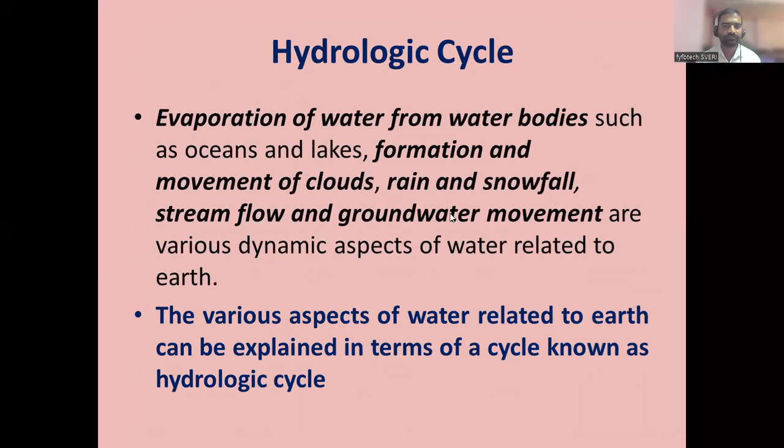In the last class we have studied about the hydrological cycle, is it correct? Yes, this is the entire cycle of the hydrological cycle. Can anybody explain this cycle?

How was your ISC paper? I wanted to ask about that one, I have not seen your paper set. How was it? Was it good or bad or okay? Any responses? Good, sir. Okay, it was good. Any other answers? Okay, better, best.

Have you written all the questions? Yes, sir. How many marks was that paper? 30 marks. Out of 15 in BCME1, will you get 15 out of 15? Anybody? Was the MCQ easy or difficult?

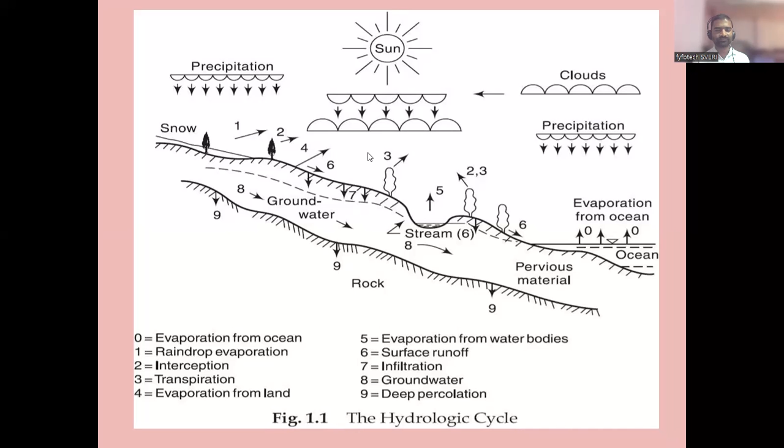Okay, so this one we have explained all the things.

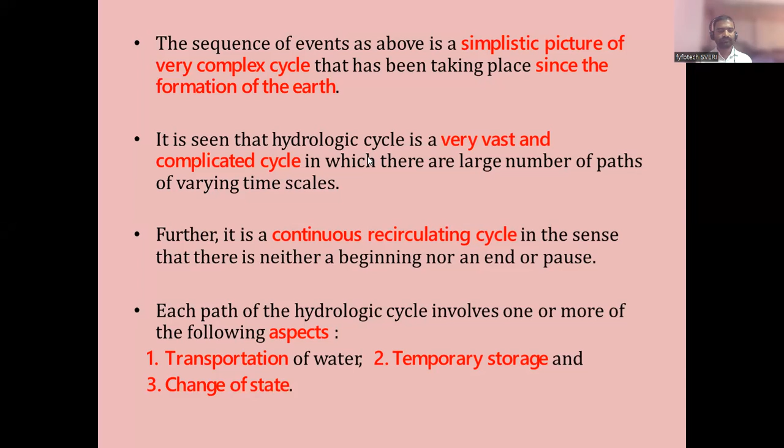Any other doubts? No doubt, no?

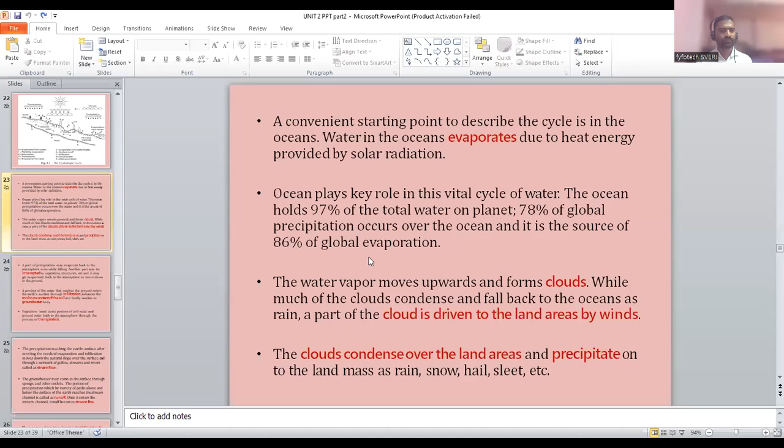Why is it not visible? Okay, this one we have completed, no? Main components of the hydrological cycle. Yes, sir. Okay.

So in the last class, is it visible everyone? Yes, sir. Okay, so this transportation component and where the water is stored, the storage component, we have seen in the last class. Okay, next, coming to the point of dams.

Can anybody tell me what is a dam? Dam means what? What is dam, yes, anyone, in your own language. Okay, no problem, accurate definition is not needed - dam, what comes to your mind? Storage of water. Yes, good, storage of water.

Next, any other definitions? Okay. Dam is a solid barrier constructed at a suitable location across a river valley to store the flowing water.

Okay, whenever water is flowing - just a minute - okay, whenever, when you consider this is a river, okay river, whenever water is flowing like this, you have to store this entire water, and you have to utilize it in a proper way. If you don't utilize this water, then it will go and reach the ocean. Okay, ocean.

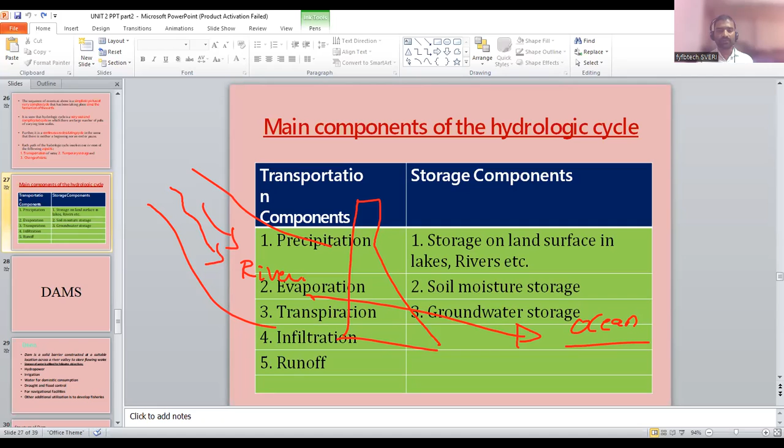Okay, in order to avoid that, in order to store this entire fresh water, we have to construct a barrier - a solid barrier constructed at a suitable location. This is important - at a suitable location across a river.

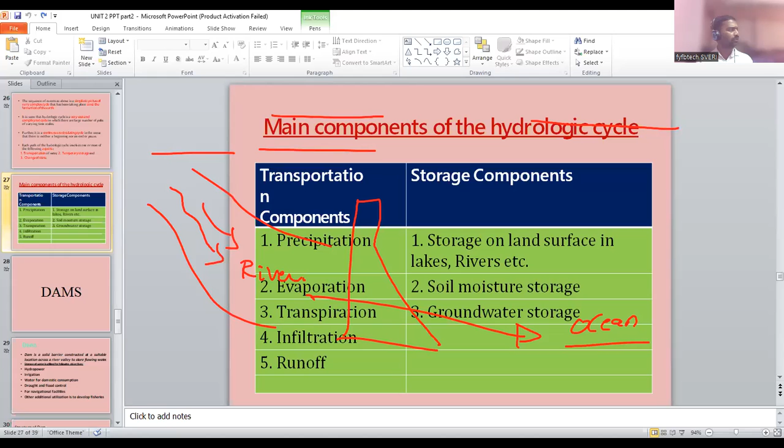Sir, has the slide changed? Slide change hua? Everyone, is the slide changing? No, sir, only it is there. Okay yes, wait, I will.

Now is it visible? Yes, sir. Okay, so dam is a solid barrier which is constructed at a suitable location across a river to store the flowing water. So when you consider this is a river - so river, is it visible? Whatever I am writing on the screen. Yes, sir, okay. So this is a river, okay, so water is flowing. If you don't store it in a proper way, then it will go and reach the ocean.

Okay, ocean. So in order to avoid this reaching the ocean, we have to construct a solid barrier, and this water is stored in a proper way.

Whatever water is stored has to be used properly for irrigation purposes, town planning, recreational purposes, residential purposes, institutional purposes, or any other purpose like drinking, bathing, clothing. For all these purposes, you can use the stored water.

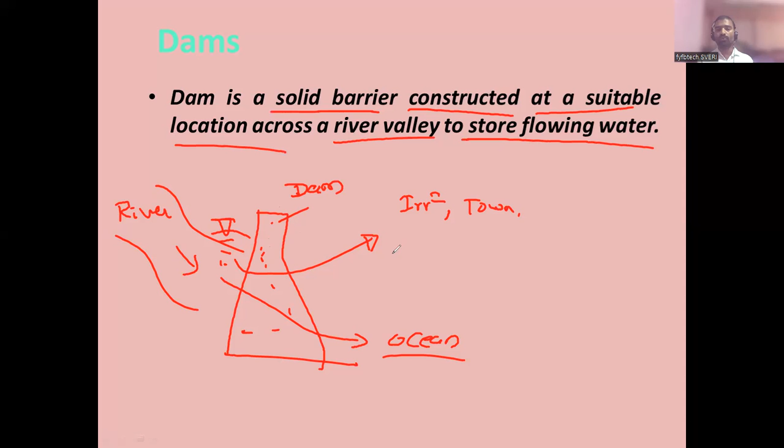So the entire structure is called what? It is a dam. What is a dam? A dam is a solid barrier constructed at a suitable location across a river valley to store flowing water. Whenever water is flowing, we have to store it in a proper way. That is called a dam. Is it clear, everyone?

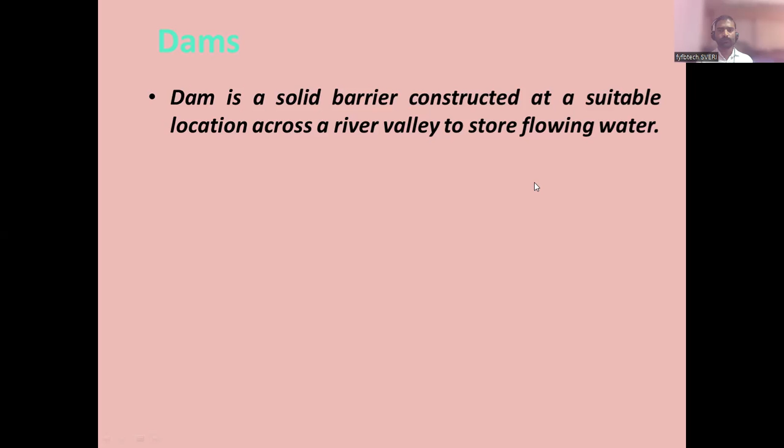So storage of water is utilized for the following purposes. Why store the water? What is the advantage of storing water? We can use the stored water for hydropower.

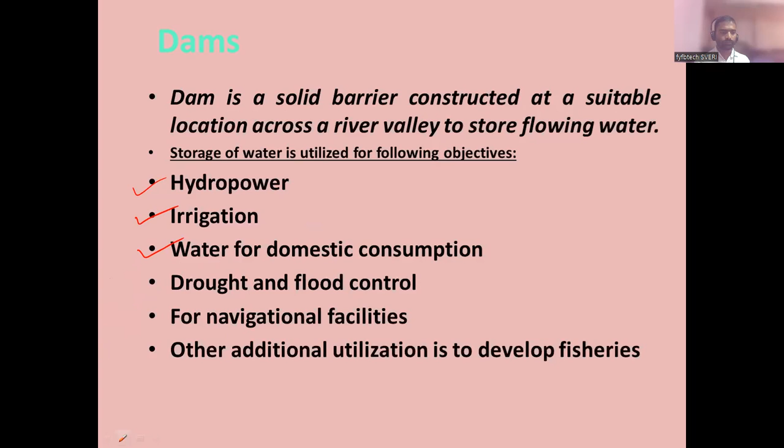Then we can use the water for irrigation purposes, for domestic purposes, and for drought and flood control. Whenever there is drought or water excess, we can use it for drought and flood control.

Next, for navigational facilities we can use it, and additionally it can be developed for fisheries. So in order to do fisheries and all, we can use this dam. The entire purpose is served by the dam.

So by constructing a dam, the main purpose is for hydropower. We can generate electrical energy from storing the water. Then irrigation purpose, we can use water for domestic consumption.

Whatever water we utilize in our day-to-day household is from the dam only. During drought, meaning when there is no rainy season, during full summer there is no rain. In that condition, the stored water can be used.

During flood control, if the rain during the rainy season is very high, the water flows excessively. The entire water is stored in a dam, and at that time the flood is controlled. And navigational activities, so these are all the purposes.

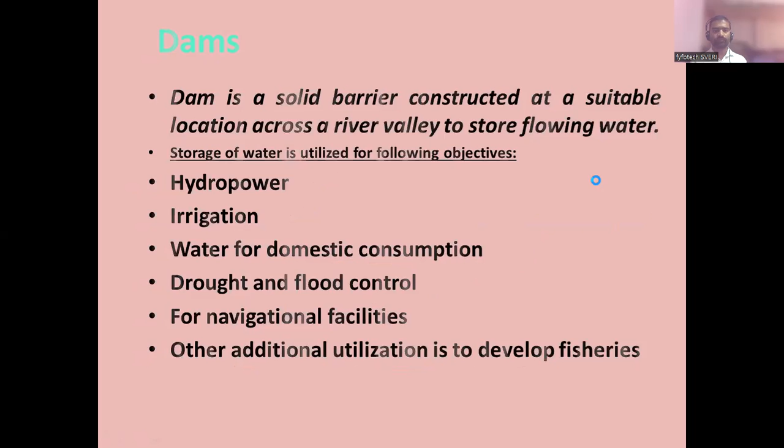Next, the structure of the dam. So this is the basic structure of the dam. Is the slide visible? Yes sir. So this is the entire concrete structure, made of different types of structures.

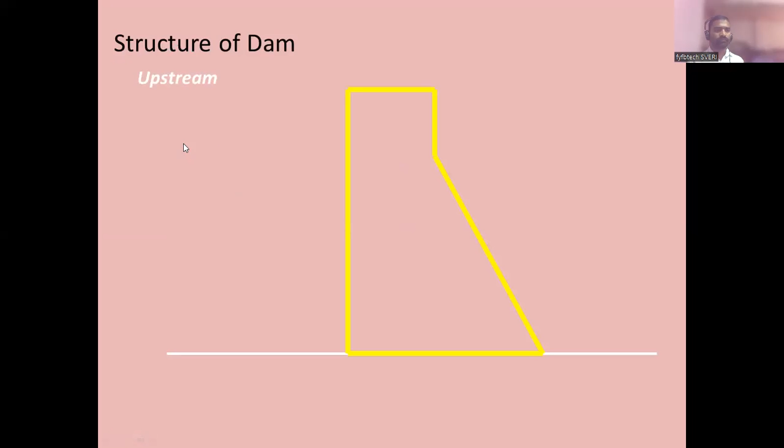So the first one is upstream side, and the other one is downstream side. Upstream means the portion of the dam in which water is stored. At the upstream side water is stored, and at the downstream side there will be a gate, and the water flows through the downstream side.

So this point is called heel. Heel is that portion at the bottom portion of a dam towards the upstream side. Heel is that portion of the dam which is at the bottom and near to the upstream.

And what is toe? Toe is the bottom portion of the dam which is at the downstream side. These two points are very important, heel and toe.

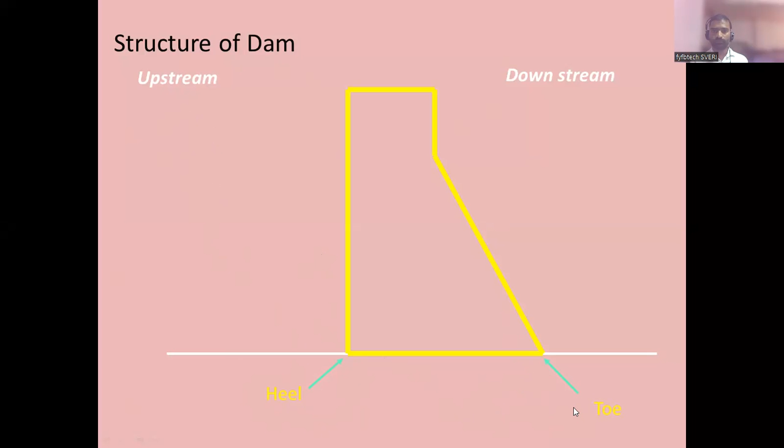Are you remembering? So from the dam, how do we take the water? Through the sluice way or sluice gate. It is called a sluice gate or sluice way.

The topmost portion of the dam is called crest, and the bottommost portion has two parts: one is heel and the other is toe. Where is the heel present, near the upstream or downstream?

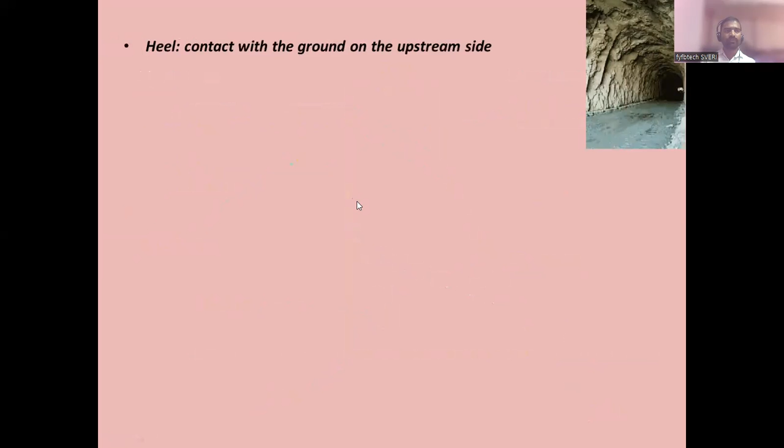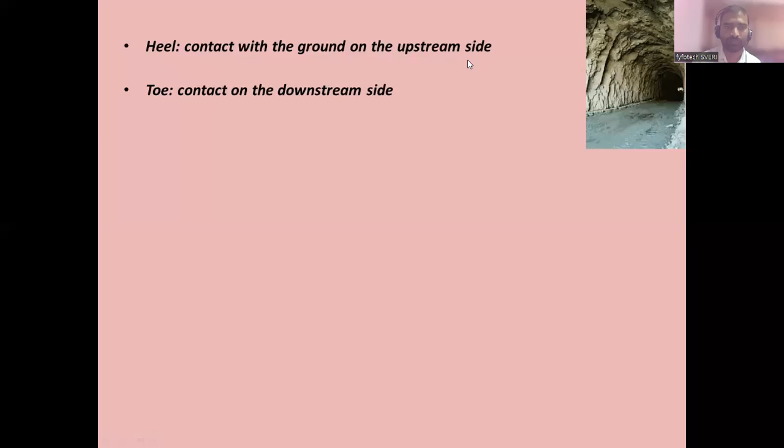Okay, so we'll see one by one, what is heel, what is and all. So what is a heel? Heel is contact with the ground on the upstream side. You have seen this is heel. It is that portion of the dam at the bottom, on the upstream side, that is connected to the ground.

Is it visible, full slide? Yes sir. So you have seen heel. Next is toe. Toe is also contact with the ground, on the downstream side. So this you have seen the toe, and this you have seen the heel.

That is called an abutment. It is the side of a valley on which the structure of the dam rests. This entire dam rests on these two structures, that is called abutments.

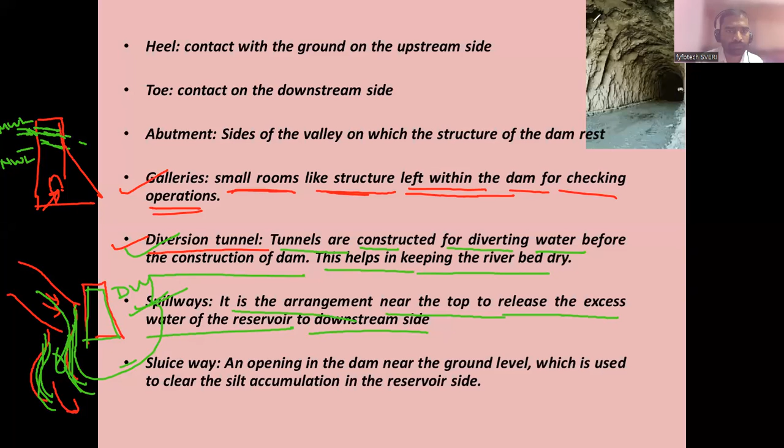So consider this normal water level, and this maximum water level, MWL. When the water is going above the maximum, at that time there will be a spillway portion, and through this spillway, the water is removed.

Then what about the sluiceway? Sluiceway is an opening in the dam near the ground level, used to clear the silt accumulation on the reservoir side. When the water is stored here, it contains silt content—sand or stone particles—that gets stored here. As these particles accumulate, the silt content increases, so that silt is removed through the sluiceway, and the gate can be opened so that water flows through the sluiceway.

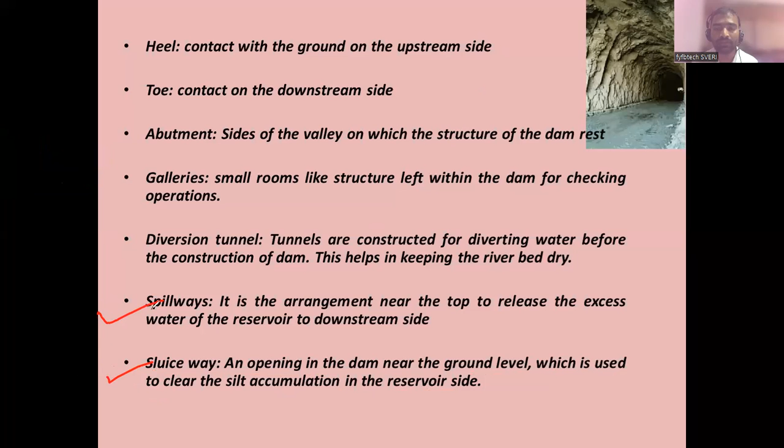So through the spillway, what is removed? The excess water above the maximum water level is removed. Through the sluiceway, the normal water is removed. If you want to use water for irrigation, it is removed from the sluiceway. If you want to allow water through the canal, you open the sluice gate. If you want water for household purposes, for the water treatment plant, you open the gate of the sluiceway. So the sluiceway gate is opened for all water works, and the spillway is opened when the water is above the maximum water level.

Now, types of dams. Before going for the types of dams, is this dam structure clear to everyone? Yes sir. Okay, see the maximum water level is here.

When the water goes above the maximum water level, through the spillway water is removed. There is also a sluiceway. When the water level is normal, in between these two, if you want to extract water, which gate will you open? That is the sluiceway. In your MCQ questions, most of the time this will be asked.

So when the water is beyond the maximum water level, which type of gate is opened? Spillway gate, sluiceway gate, both or none? Above the maximum water level, spillway is opened.

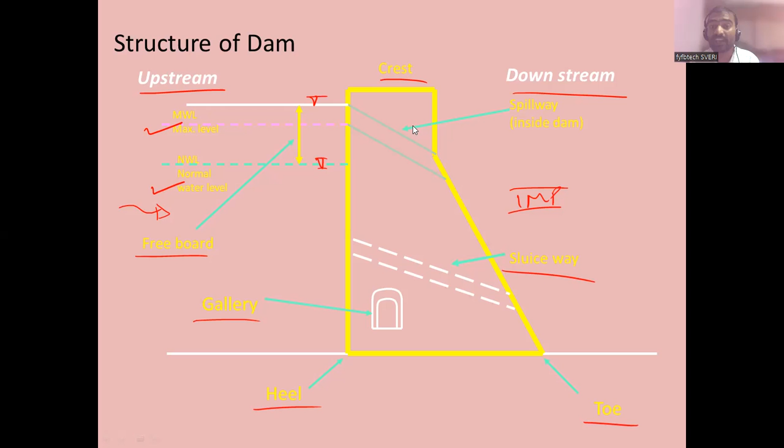If the water is used for river or irrigation purposes, which gate is opened? Spillway gate, sluice gate, both or none? For irrigation and for all purposes, the sluiceway is used. The spillway is used when the water level in the dam goes beyond the maximum water level, and that excess water is removed. That is called a spillway.

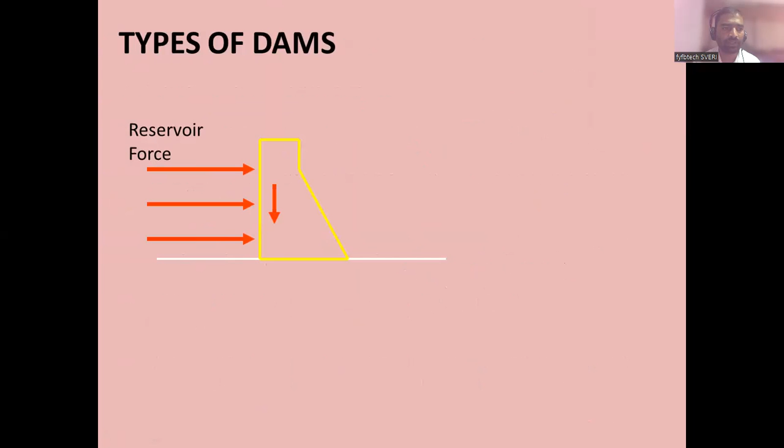Then there are different types of dams. What are the types of dams? We will see. You have seen this is the reservoir. This is the entire dam.

In the dam, two types of forces are acting. One is reservoir force and the other is self weight. The downward force acting on the dam is called self weight of the dam. Then what about this horizontal line? These are the water forces. The water force acting on the dam is called reservoir force.

Water is storing, correct? The entire water is coming and striking the surface of the dam. Hence there is a reservoir force striking the dam.

Then gravity dams. What are the different types of dams? First, types of gravity dams. The first type is the gravity dam. What is a gravity dam? These dams are heavy and massive wall-like structures of concrete in which the whole weight acts vertically downward.

Here you can see it like this, but the entire dam will be from here to here. It is very heavy. The weight of the structure is very heavy and massive, a massive wall-like structure of concrete in which the whole weight acts downward. The entire weight of this dam acts downward. Such a dam is called a gravity dam.

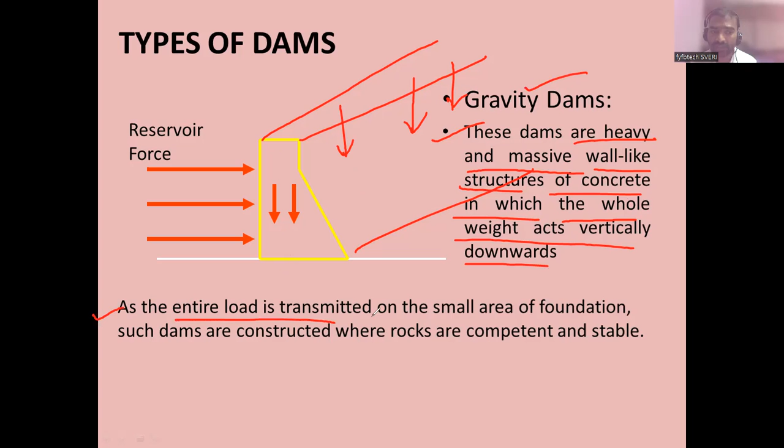As the entire load is transmitted on a small area of the foundation, such dams are constructed where rocks are competent and stable. If it is a gravity dam, its foundation is very small. So in order to withstand a very heavy structure, the foundation should be laid on rock that is competent and stable.

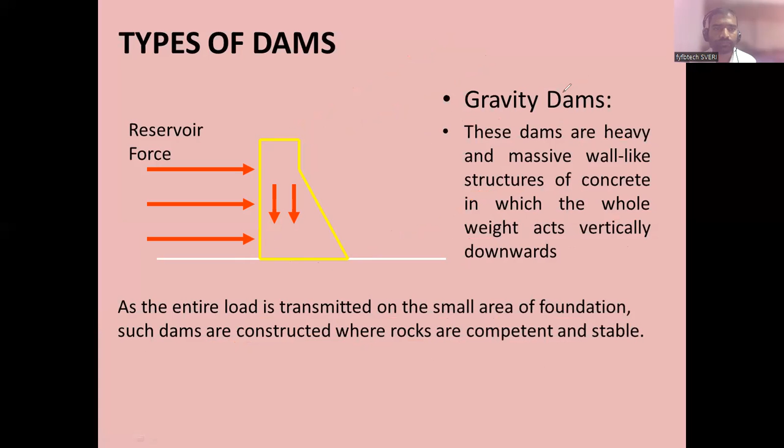Okay, then see, this is the structure of the gravity dam.

See, from here to here there will be a very long length. The entire amount of water is storing. The entire weight of this dam is acting downward.

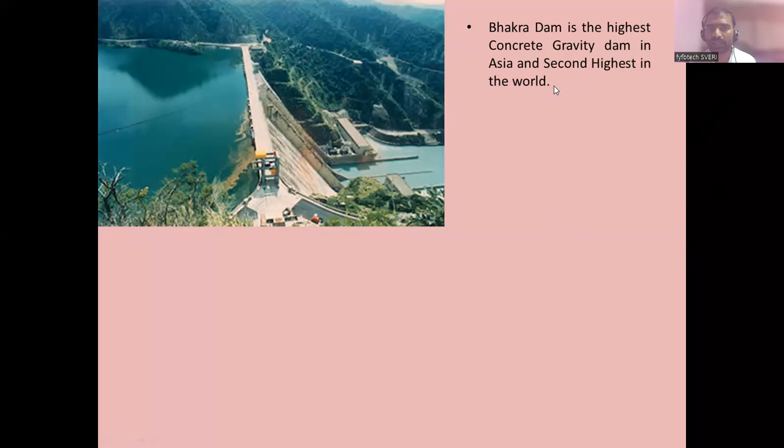Next, Bhakra Dam is the highest concrete gravity dam in Asia and second highest in the world. Bhakra Dam is across the river Sutlej in Himachal Pradesh. Where is the Bhakra Dam? It is in Himachal Pradesh. Across which river is it constructed? It is constructed across the Sutlej river.

In multiple choice questions, you may be asked: Bhakra Dam is constructed across dash river - that is Sutlej, located in Himachal Pradesh. This Bhakra Dam is the highest concrete gravity dam. So Bhakra Dam is dash type of dam - it is a gravity dam. It is second highest in the world and first highest in India or Asia.

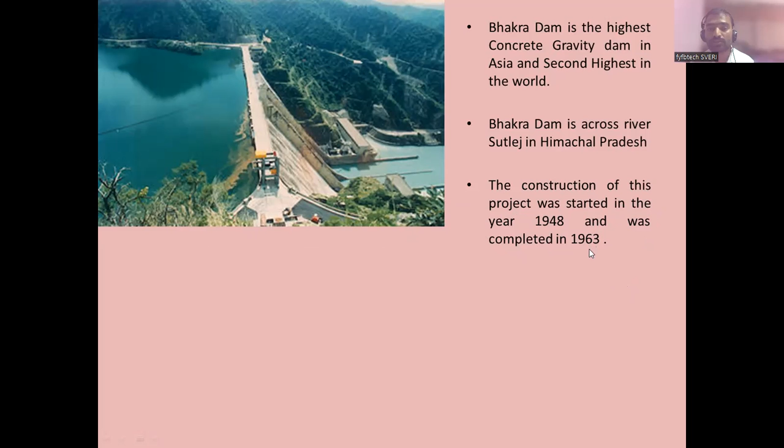The construction of the Bhakra Dam project was started in the year 1948, very soon after independence, and it was completed in 1963. It took around 15 years to complete the entire project.

The height of the Bhakra Nangal project dam is 740 feet high, above the deepest foundation as a straight concrete dam, being more than 3 times the height of the Qutub Minar.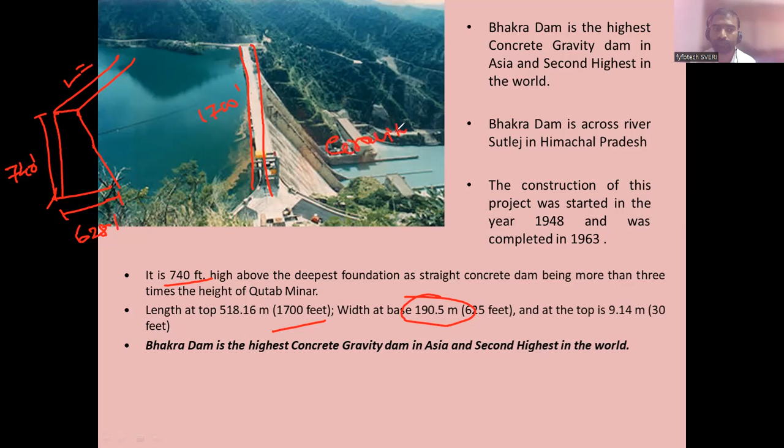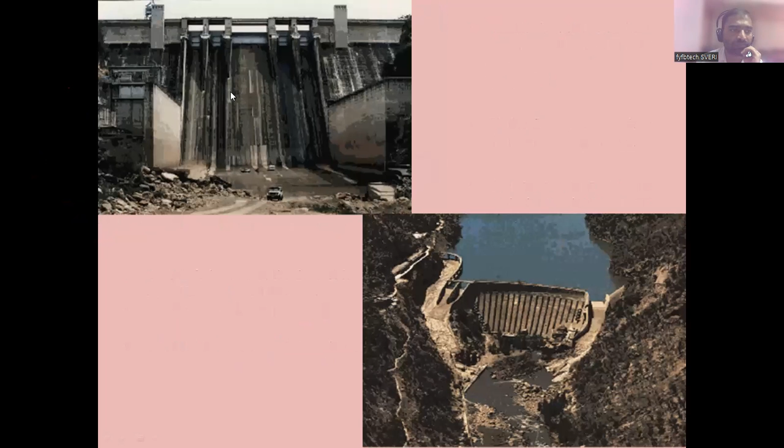See, again, one point is given. Bhakra Dam is the highest concrete gravity dam in Asia and second highest in the world. See the dams, these all are the gravity dams. See the structure.

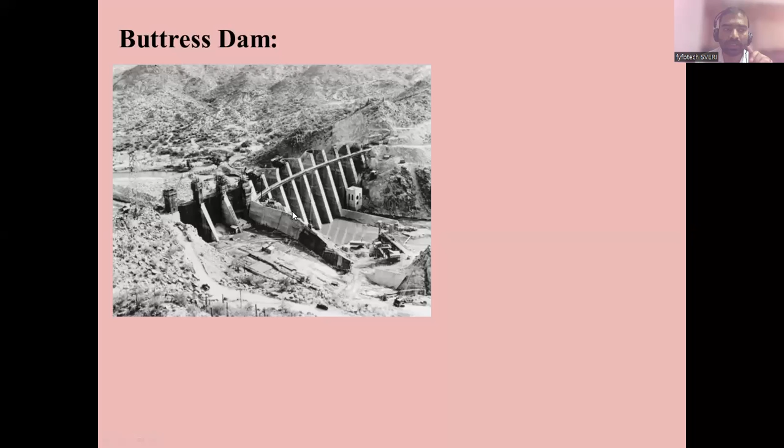Next one is Buttress Dam. Here buttress dams are like buttress, in which the weight of the entire structure is transferred from one buttress to another. So Buttress Dam is a gravity dam reinforced by structural support. It is a gravity dam only, but it is reinforced.

What do you mean by reinforced? Reinforced means what? I told in the class. What is reinforced, matlab kya hai? RCC means what, can anybody tell me?

RCC, reinforced cement concrete. Yes good, then what do you mean by reinforced means what? Reinforced means steel is present. Good point. So Buttress Dam is a type of gravity dam only, but it is reinforced by the structural support. It is made up of steel structures, that is steel is present.

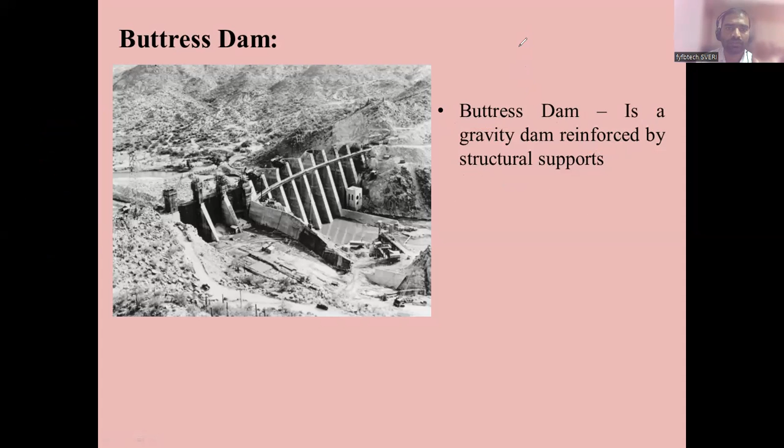So buttress means what, you can just see. Buttress is a support that transmits a force from the roof or wall to another supporting structure.

See, this is one buttress, this is one buttress. If there is water pressure, that pressure is transferred to another structure, like this entire structure is transferred, and finally it comes to the side abutments, or finally to the ground. Whatever the total self weight is, that will come there. Sometimes there is horizontal pressure, that will come to the abutments. Buttress is a support, so it is like a column.

Consider this is a very high structure building, a high rise building. So one floor's wall weight is coming to this column, that column transfers it to the next floor. So here there is weight that is transferred to the next, transferred to the next, transferred to the next, it is transferring through reinforcements that will transfer the load. The same way, this buttress is a support that transmits a force from a roof or wall to another supporting structure. This type of structure can be considered even if the foundation rocks are a little weaker.

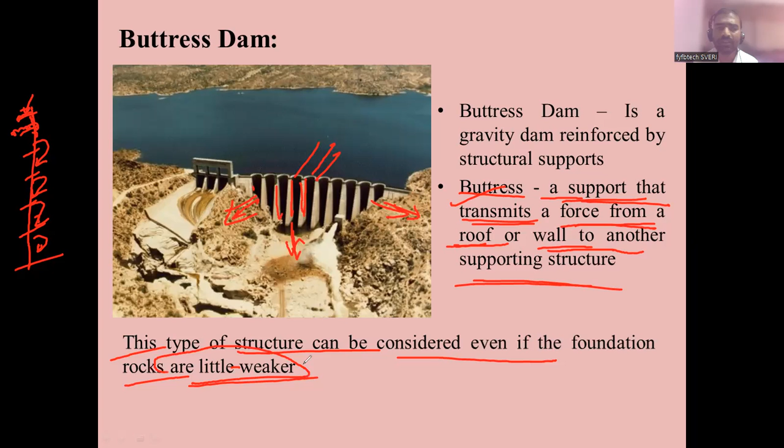You have seen gravity dam's foundation should be very strong, that is the dams are constructed on a rocky foundation, but buttress dams can be constructed even if the foundation is rocky but a little weaker, you can adopt this buttress dam also. Is it clear? Yes sir.

Okay, next one is arch dam. What is this arch dam? These type of dams are concrete or masonry dams which are curved or convex upstream in plan.

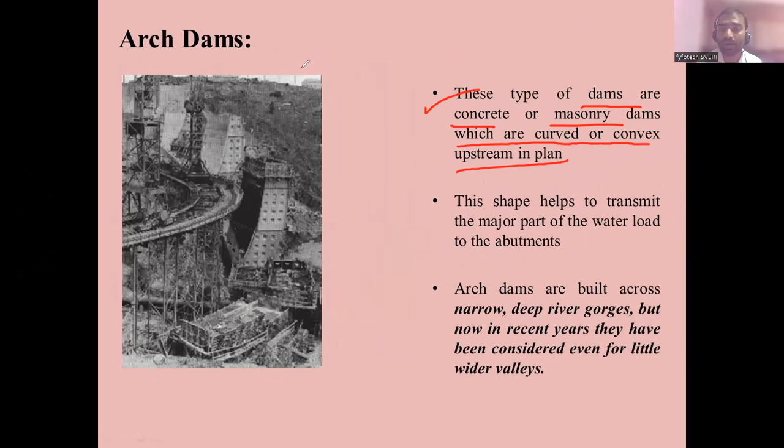What is upstream? Upstream means where the water is stored. See, this is the dam, this is upstream, here the water is stored, here is downstream. So curved or convex upstream in plan, this shape helps to transmit the major part of the water load to the abutments.

If consider there is a flow of water like this, there will be an upstream side, correct? So there is an arch like structure. Is the convexity upward or downward?

Convexity is upward only, on the upstream side. Water is stored here, the convexity is here. So there is a large structure. The weight of water comes and hits the dam. This dam transfers the load to the abutments. See, this is a dam, there is an abutment at this point, and again there will be an abutment at this point. Their shape helps to transmit the major part of the water load to the abutments.

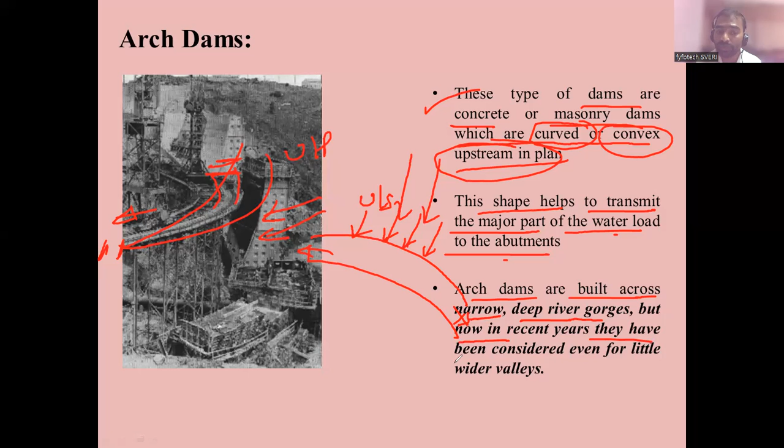Arch dams are built across narrow, deep river gorges, but in recent years they have been considered even for the little wider valleys also. You can see in the figure, I'll show the figure, you will come to know.

See, there is an arch dam, see there is the arch. Now, first of all, you should know what is convexity and what is concavity. So now can we tell, is it convex or concave? Concave, concave, okay.

So if we consider this is upstream, water is storing, that is concave. So now, is it concave or convex? Convex, convex. So when you consider this is upstream, water is okay here.

Here water is stored, so see here, dam. This is an entire dam. So see, it is concave, convex, water is flowing here, water is storing here, upstream side. Upstream side water is storing, so this is the downstream side.

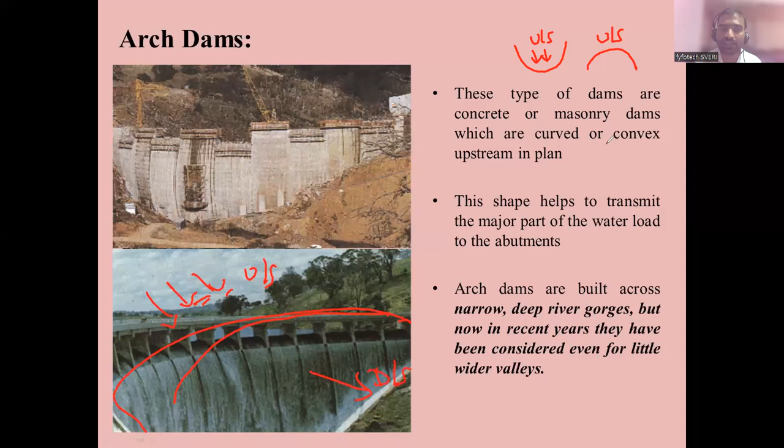Upstream, upstream. So for the arch structure, arch dams, the convexity is towards the upstream in plan. This type of shape helps in transmitting the major part of the water load to the abutments.

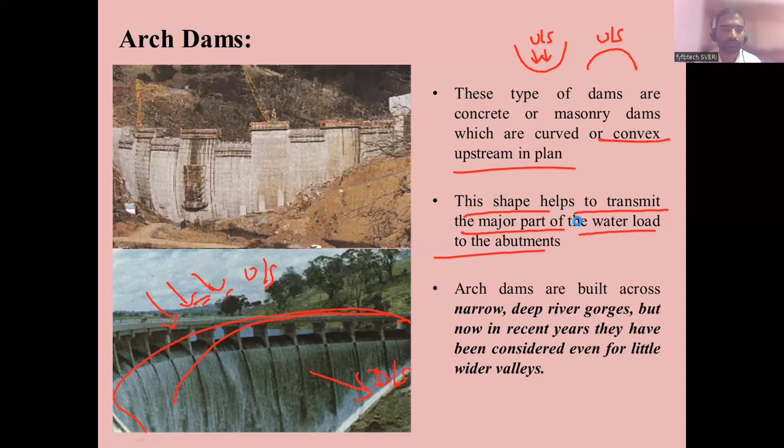Now see, is this like an arch? Arch type shape, no? So water is stored here. This entire portion is where water is stored, and when required, the water is removed through the downstream side.

This is the abutment, this side is abutment. So water is giving pressure to this dam, and the dam transfers it to the abutments. Self weight acts downward, but water pressure acts horizontally. That horizontal load is transferred in the transverse direction.

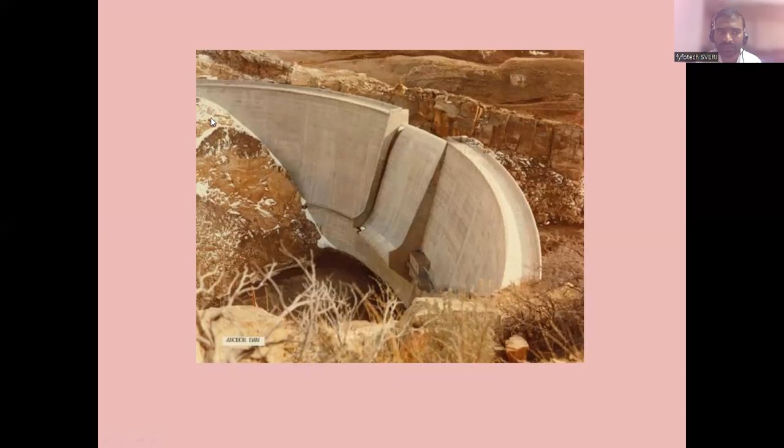See, so this one is exactly how it is. Is it an arch dam? Correct, yes sir. So see, is it upstream or downstream? This is upstream, this is downstream. So what about this one, and this one? These are the abutments, this is the entire arch dam, which is supporting the abutments.

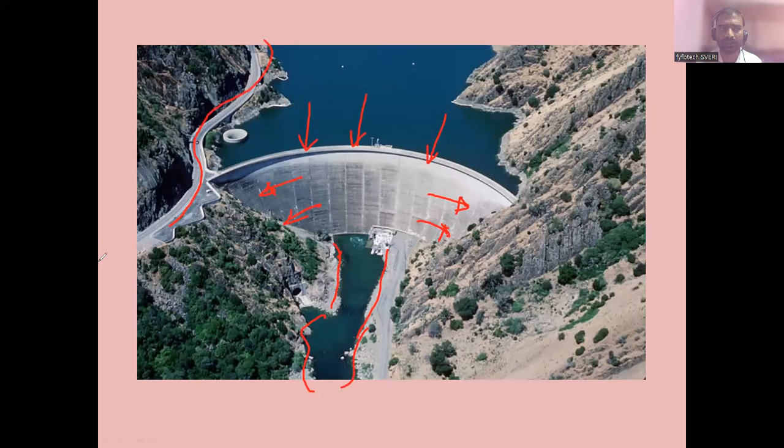So the self weight of this dam acts downward. The water pressure comes and hits the dam in the horizontal direction. That horizontal pressure is directly converted and transferred to the abutments. This is narrow river gorges. So this is how the arch dams are. Again, if you want to travel, there will be river roads and all, you can travel here.

Next one is the earthen dam. These earthen dams are trapezoidal in shape. So you can see here, is it visible now, all of you? Yes sir, so it is visible. So these are trapezoidal in shape, earthen dams are trapezoidal shape.

See, there is no reinforcement, only the pure material is earth. Earth material is there, hence its shape is trapezoidal. Earth dams are constructed where the foundation or the underlying material or rocks are weak to support a masonry dam, or where the suitable competent rocks are at greater depth.

See, this is the ground level. When you consider the foundation material, it should be strong or weak. So whatever structure you are constructing on the ground level, the foundation should be strong, correct? Yes sir.

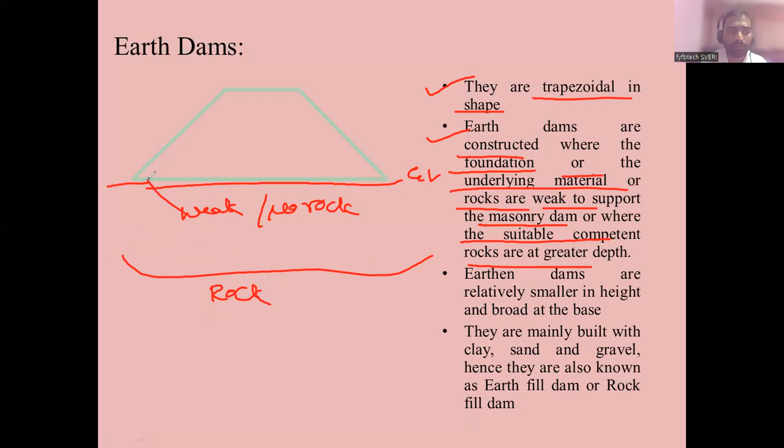But in this case, if the foundation soil is weak, or there is no rocky foundation, or the rock is present at considerable depth with weak material above it, in that case you can go for earthen dams. So earth dams are constructed where the foundation or underlying material, the material below the dam, is weak to support a masonry dam, or where suitable competent rocks are at greater depth, then we can go for earthen dams.

Earthen dams are relatively smaller in height and broader at the base. See, the base is from here to here, but the height is only this much, because it is made up of purely earth material. That's why the base will be very large as compared to height.

Whereas in case of arch dams or gravity dams, the height was very large as compared to the width. Width was less than height there, height was very large compared to width. But in case of earthen dams, the breadth is very large as compared to the height.

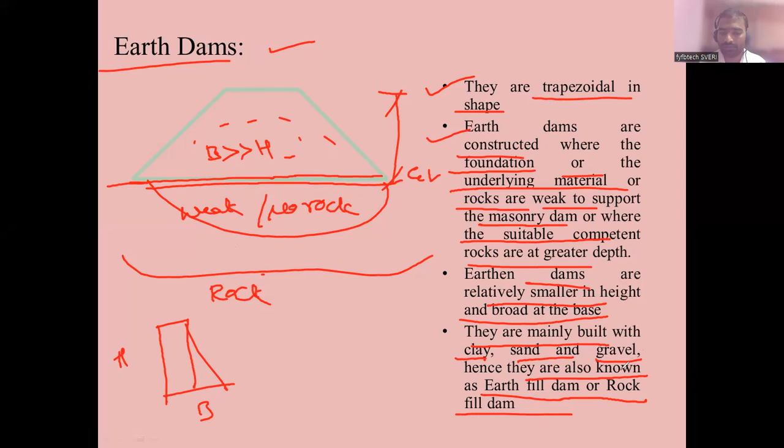These dams are mainly built with clay. The material for the entire dam is clay material, sand and gravel. Hence they are known as earth-fill dam or rock-fill dam. The material of these earthen dams is clay, sand and gravel, so it is known as earth-fill dam or rock-fill dam. Is it clear, everyone?

So the base width is very high as compared to the height. Height is very less because it is made up of purely earth material.

When are earthen dams preferred? When the foundation is very weak, or when the rocky soil is at a greater depth, then we can prefer these earthen dams.

There will be intake structures. Through this, the water is extracted and it is transferred to the water treatment plant.

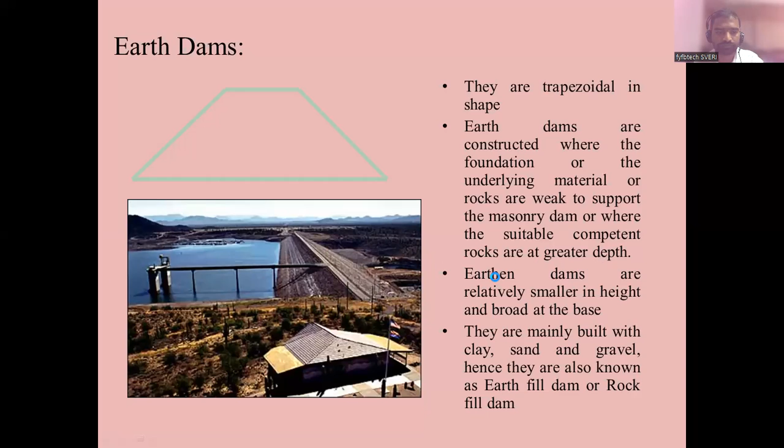So this is all about water resources. In the next class we will study about the different types of transportation systems. So let us check out the syllabus of the second chapter.

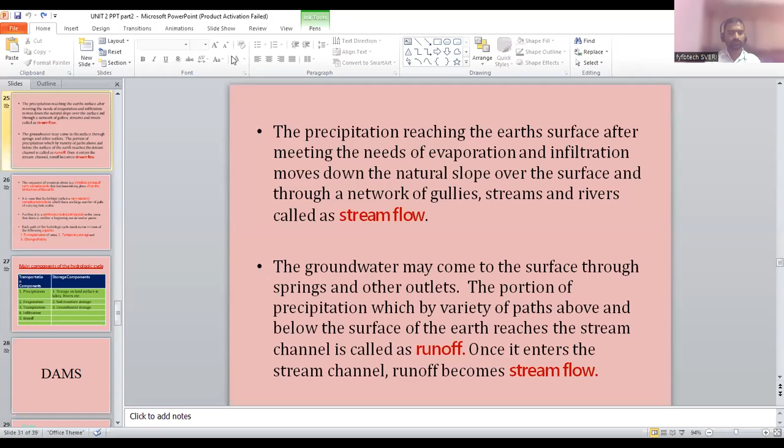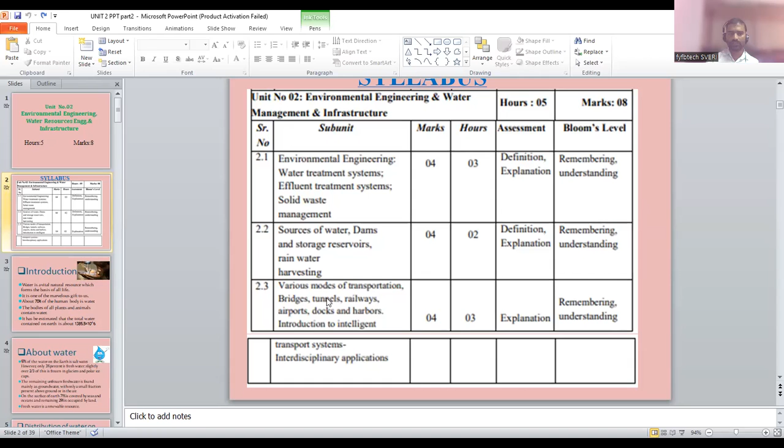Is it visible now? Syllabus: Environmental engineering completed. Water treatment plant, effluent treatment, solid waste management we have completed. Sources of water, dams, and storage reservoir, rainwater harvesting - we have completed up to this much. Next class we will see about the various modes of transportation: bridges, tunnels, railways, airport, docks, harbors, and introduction to ITS.

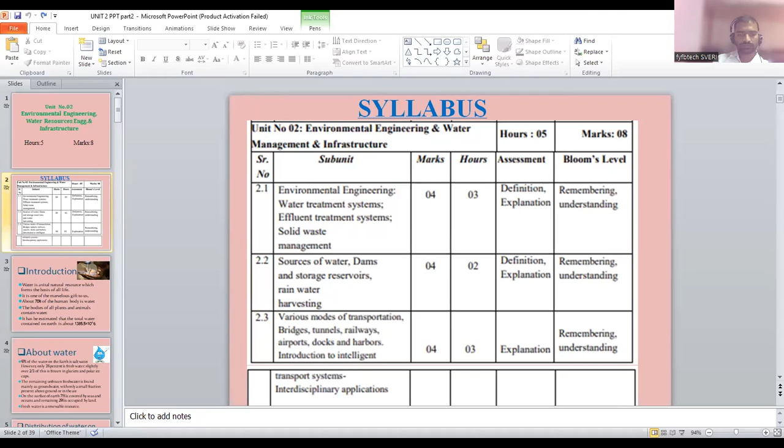Okay, so now I will go for the attendance. How many students are present? Still there is a time. Roll number 1. Present, sir. Just a minute. Roll number 2. Roll number 2. Yes, sir. 3, Present, sir. 4, Present, sir. 5, Present, sir. 6. 6 is absent. 7, Present, sir. 8, Present, sir. 9, Present, sir. 10, 10, 11, Present, sir. 12, 13, 14, Yes, sir. 15, Present, sir. 16, Present, sir. 17, Yes. 18, Yes, sir. 19, 19 absent, 20, Then, sir. 21, 21, Dattatreya, 22, 23, Present, sir. 24, Present, sir. 25, Present, sir. 26, Present. 27, 28, Present, sir. 29, Present, sir. 30, Present, sir. 31, Present, sir. 32, Yes, sir. 33, Present, sir. 34, Present, sir. 35, Present, sir. 36, Present, sir. 37, 37, 38, Present, sir. 39, Present, sir. 40, Present, sir. 41, Present, sir. 42, 42, 47, 43, 43, Present, sir. 44, Present, sir. 45, Present, 46, Present, sir. 47, Present, sir. 48, Present, sir. 49, Present, sir. 50, Yes, sir. 51, Yes, sir. 52, Present, sir. 53, Yes, sir. 54, Yes, sir. 55, Present, sir. 56, 56, 57, Present, sir. 58, Yes, sir. 59, Present, sir. 60, 61, 61, Pratik, 62, 62, Vrushal, 61, 62. Present, sir. What is your number? 62. 62. What is your name? What is your name? Vrushal Swarat. Ah, okay. So 61, Pratik. 60 is present, huh? Okay, 60 is present. Okay, the absent numbers 6, 10, 12, 19, 22, 27, 37, 42, 56. Okay, these are the absent numbers. Yes, 6 is present, sir. 6 is present.